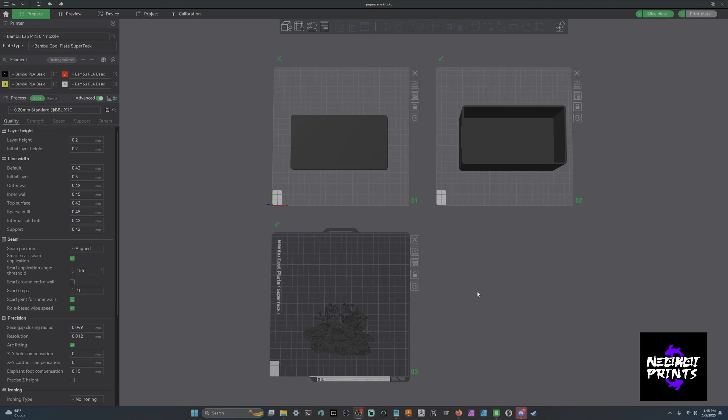Let's get into it. So we are going to start with putting a HueForge onto a functional design. This is a box that I found over on MakerWorld. I will put a link to it in the description.

So currently the lid for this box is face down so that if you have a fancy build plate or whatever, you'll get that design or that pattern onto the top of the box, so it might look a little bit better. But here we want to add our own designs to it.

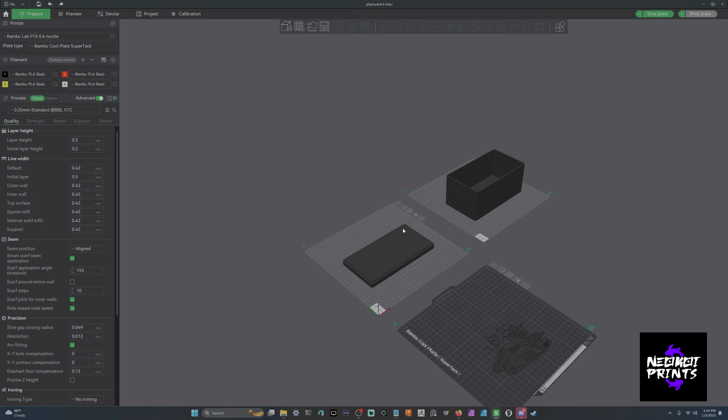So what we would need to do is come over to this plate. We need to flip it, so we'll lay it on its face, that way it's flipped over. Now when we do this, we are going to have to add support to this model, but that's okay, not a lot of support for this.

Now we will bring our HueForge over to the same plate, and we are going to hit Control on our keyboard, and we are going to select both items, and we are going to merge them. Now if we come over here to the objects, you will see that we have an assembly. We have the original lid, and we have my design.

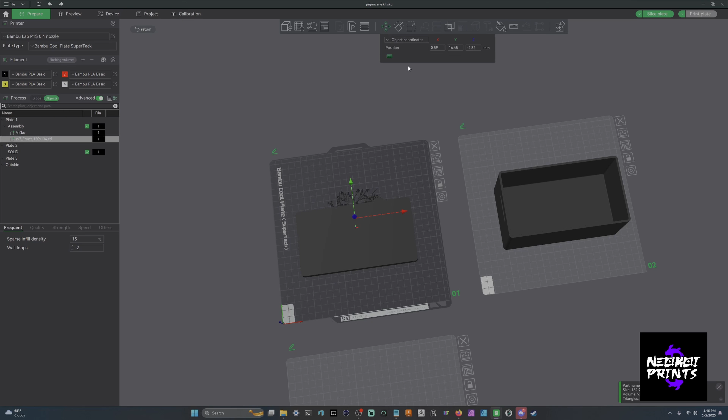Now what we need to do is, while they're assembled, we need to move the HueForge up so that it is on top of the design itself. I'm going to make this red just so that I can see it a little bit easier while I'm positioning my HueForge in place. So let's bring this down.

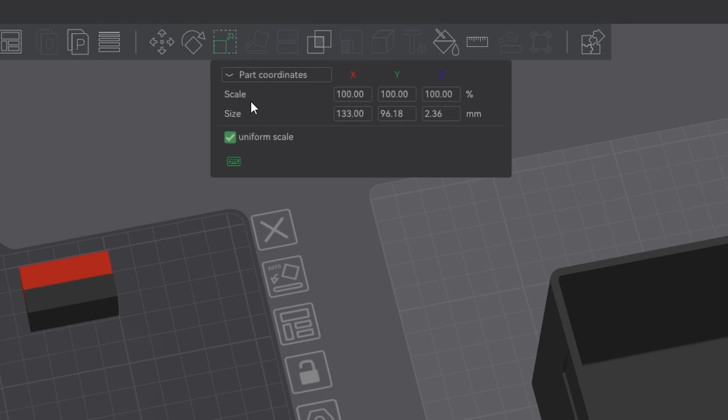Now, if you need to scale these HueForges, you're more than welcome to. For my design, I don't, but if you need to scale, all you have to do is turn off uniform scale, and then you can adjust your X and Y. You don't want to touch your Z, but X and Y will shrink it down the ways that you need to. If you adjust the Z, it's going to mess up your HueForge, it's going to mess up your swaps.

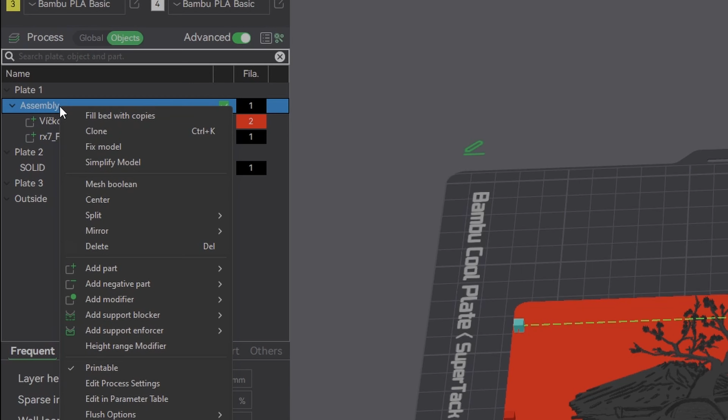Okay, so now that we have our design, the next step is going to be, we need to click on our assembly, right click, and then add a height range modifier. We are going to print the box lid at 0.2 layer heights, that way it doesn't take forever. And then once it gets to our HueForge on the top of the box, that's when we'll bring it down to that 0.08 layer height for this model, or 0.04 layer height, whatever the case may be for your HueForge. So that way we're not printing it forever at 0.08, and it's not taking us forever and a day to print this design out.

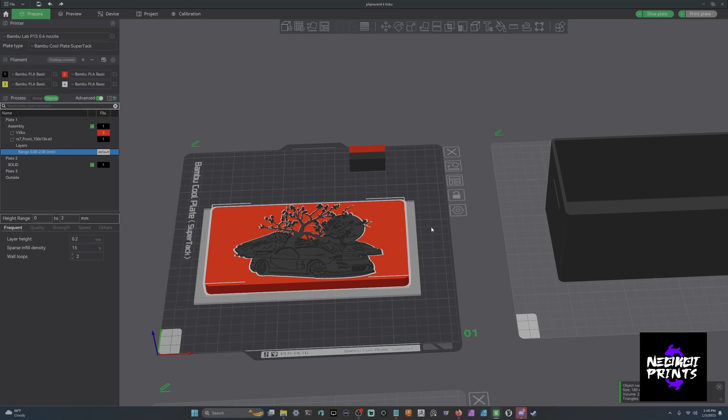So here we need to bring it up. I know that my HueForge starts at about 14 millimeters and it goes to about 16 millimeters, and you can see that there's a visualization to show you where it's going. Actually, it might be a little bit lower. Let's go to 13. That's a little bit better.

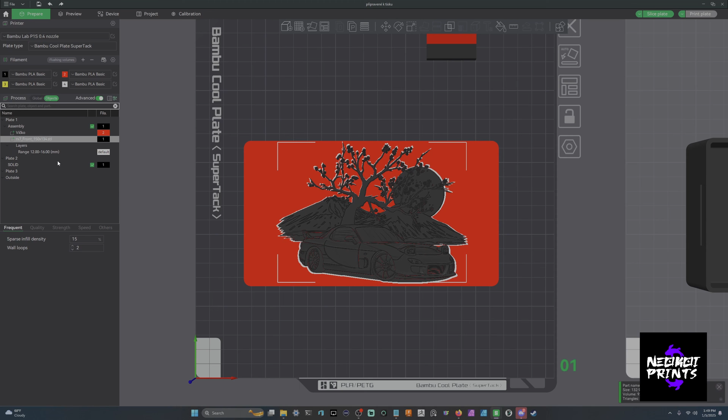So now everything in between these two ranges, the green box and this clear box, that's all going to be printed at 0.08 layer height. Now that we have the height range modifier set up so that everything in between is going to be printed at HueForge layer heights, we'll click on that modifier.

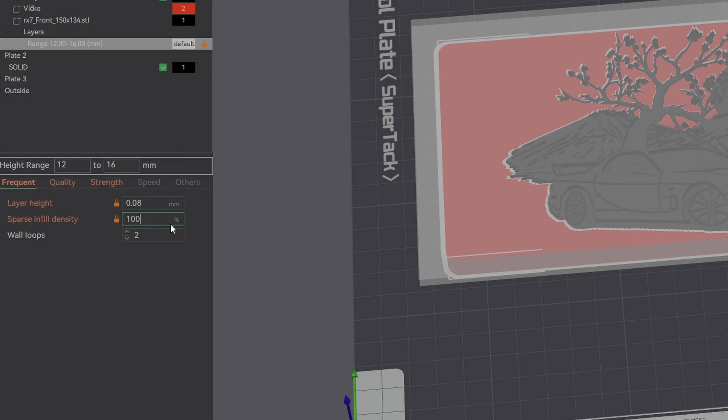You can see here you've got your layer heights, your infill density, and your wall loops. We're going to bring it down to 0.08 for this particular model, and then we'll ignore this, and then we will come here and we will bring it to 100% infill density, and then we will bring this down to 0. So now everything in between this range is going to print just like our Hue Forge, whereas everything below will print like standard settings that you want for your box.

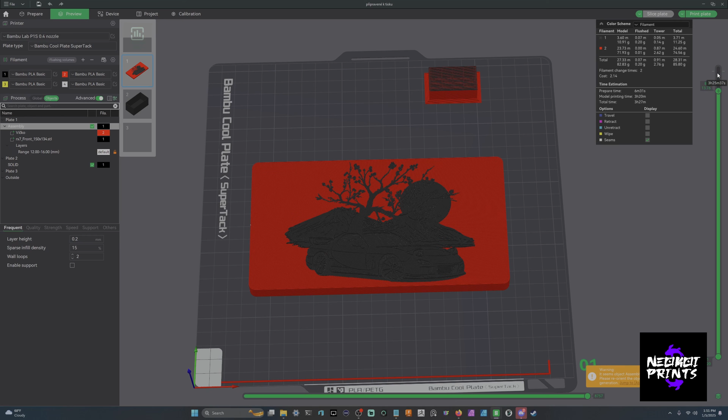So let's go ahead and we will slice it. Now we are going to take our swap file. You can see here that we start with black, and then at layer 10 or 0.88, that's when we'll swap to red. Here we're going to have to do a little bit of math. Not much, but if you come down, it should be around 12 that we start our Hue Forge. You can see here. Now if we come up to 12.88, that is where we will do our first color swap.

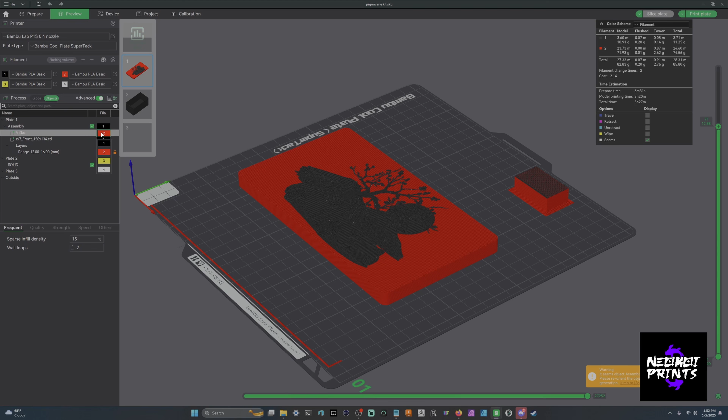Here's something that I forgot to mention. You can't do multicolor printing and Hue Forge printing. Because right now the Bambu Slicer thinks that we have two separate color models, thinks that we're going to do multicolor printing, you can see it by the prime tower, it won't let us do our change filament command. So what we need to do is make that box black again. And now we will slice it one more time. Now you can see that both the Hue Forge and the plate are the same color. At 12.88, we can change filament to red.

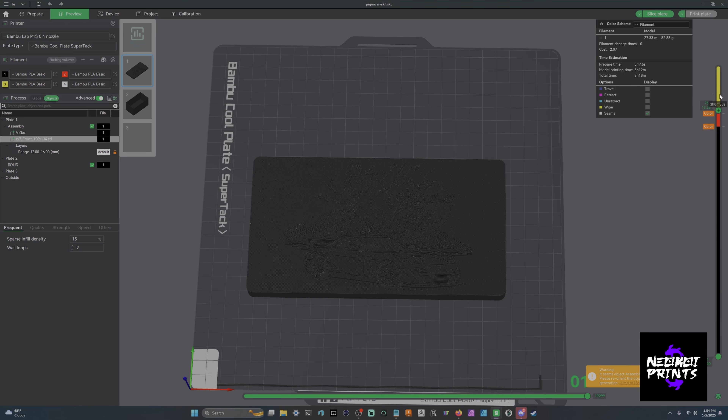So now let's go back to our document, and you can see at 1.2 we will swap to yellow. So that means at 13.2 we'll swap to yellow. Bring it up. Now we've got 1.28, we'll swap to white. So 13.28, we will swap to white. Now we have our Hue Forge stacked on top of a functional print.

It's saying that we have some floating areas. That's because we didn't add any supports yet, so I can go ahead and do that. Let's go over to global, add some supports. So now this thing is good to go to the printer just as is. I will print this out and show you what it looks like at the end, but this is how you can add a Hue Forge to a functional print. It's very simple, very easy to do. There just haven't been any real tutorials out there for it, so I figured I'd show you guys how to do it.

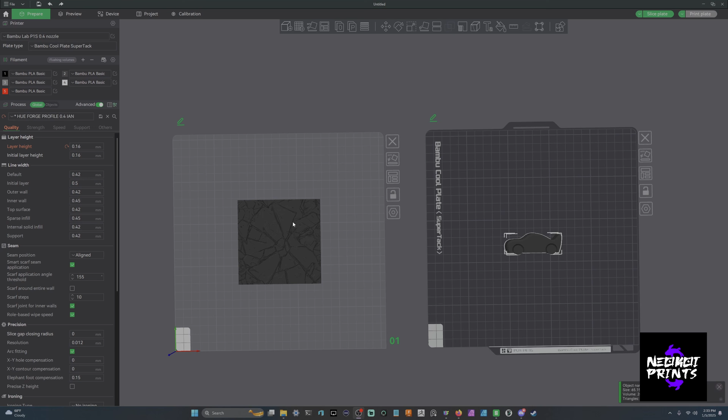Now let's do the reverse. We're gonna add a traditional 3D model to a Hue Forge. We've got this glass Hue Forge, which is the background, it's shattered glass. And then I've got this car model over here. This will also be linked in the description. What we need to do is cut this in half, and then combine it with this background to create that 3D look where it's coming out of the picture.

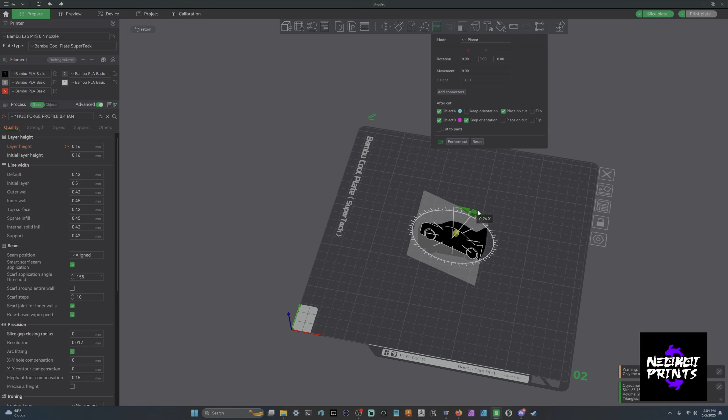So in Bambu Studio, all you have to do is come up to the cut function, and then you can rotate the cut, and you can see the plane rotating. That is where it's cutting. And let's give it a little bit of character. We can maybe make it look like it's coming out in a diagonal. We can use the green to move this around, and then we will perform the cut.

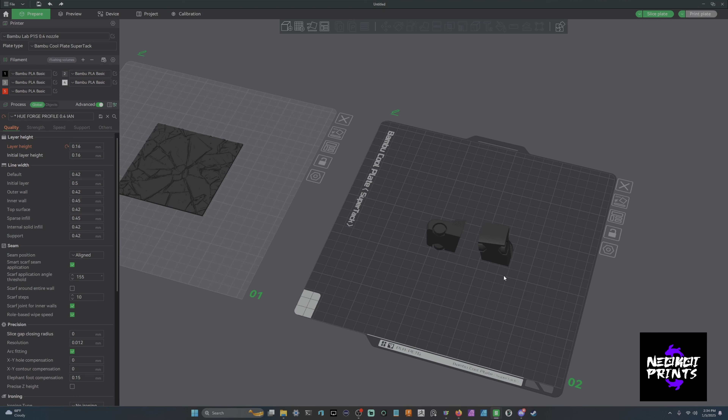Now the cut is going to cut it into two different pieces. We've got the rear of the car and we've got the front of the car. We're going to use the rear of the car so it looks like it's driving in. So we will delete the front of the car, and now we've got something like this. We want to make sure that it's lined up where we want it. You can also scale this if you want to, like so. Maybe we want it a little bit bigger so that it covers it a little bit more.

And then what we need to do is the same thing that we did in the last one, which is we need to hold Control on the keyboard. We have the car selected, and we will select the HueForge. Now we will merge those together. Now this is an assembly. So since it is an assembly, we need to take the car and lift it up just a hair.

And now something important to bring up: if you had a 3D model that you wanted multicolor and the HueForge, that's just impossible. You have to pick one or the other. You can only do swap by layer, or you can only do multicolor printing, like multiple swaps per layer. So just keep that in mind when you're doing this. If I wanted this car to be different colors, I would actually have to physically paint the wheels or something along those lines. So now we're going to have to do the height range modifier again.

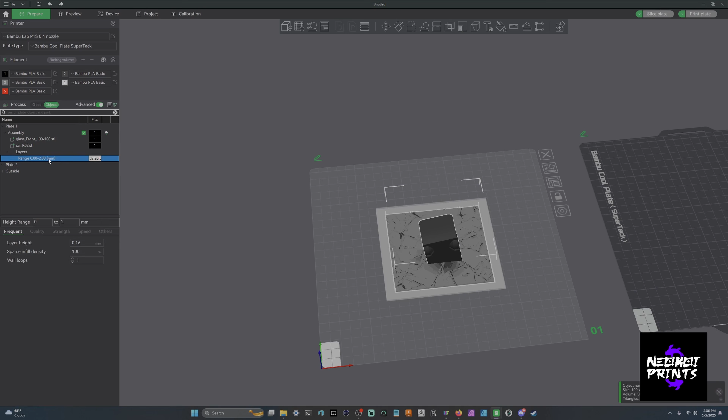We will do the height range modifier for the car this time. So let's go to our assembly. We will add the modifier. And now we can set up where we need that modifier. So the described text of this glass HueForge shows us that the max depth is 2.2 and actual depth is 2.4. So that means that we can set our height range modifier to 2.4 starting and then upwards for the rest of the car. So let's go ahead and do that.

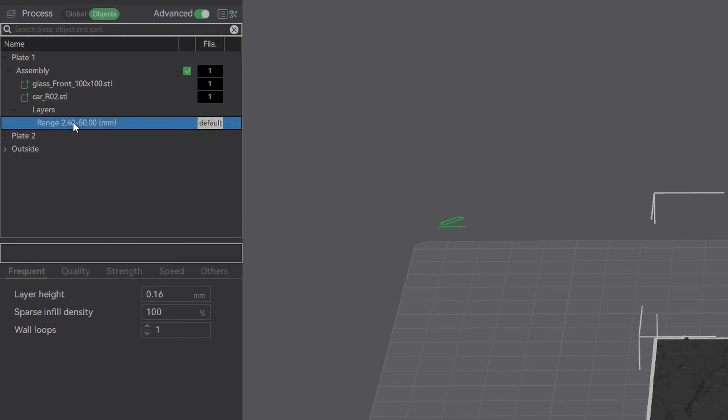We will set this to 2.4, top end to about 50 millimeters, and you can play around with this just to figure out what range you need. So now in our height range modifier, we will set it up the way that we want it. So we will do 0.2 layer heights. We're gonna do 10% infill, maybe 2 wall loops.

So now once we're done slicing the Hybrid HueForge, you can see if I drag this down, we have a normal amount of infill on the inside, and then it's 100% infill on the bottom. So now we need to do our color swaps. So let's grab this. It says at layer 6 or 0.96, we'll swap to blue gray. At layer 6, 0.96, I'm gonna just swap to this dark gray that I already have loaded so I don't have to reslice this whole thing.

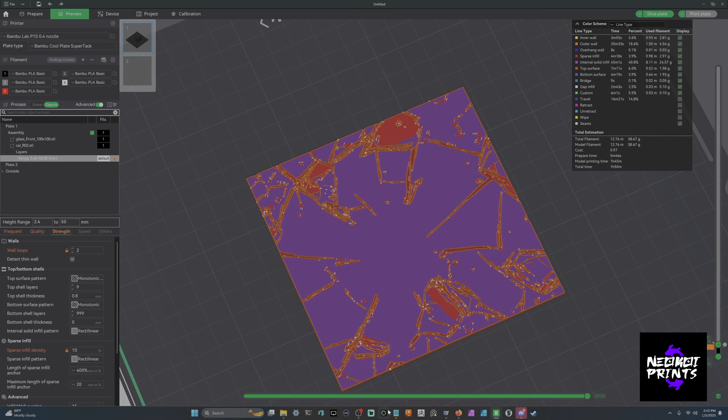And then at 1.28, we swap to gray. Swap to gray. And then 1.76, we'll swap to white. Now, if we slice it again, what's going to happen is the car itself is going to be white.

Now, like I said, if you wanted to do this hybrid HueForge with multiple colors, that's impossible. But you can still swap the color so that this is not the topmost color of your HueForge. So I have the red already loaded up. Let's go down to where the hybrid starts, about layer 14, and we will swap that to red. Now if we slice it, you can see that the car is now red. You can see that there's red on top of this.

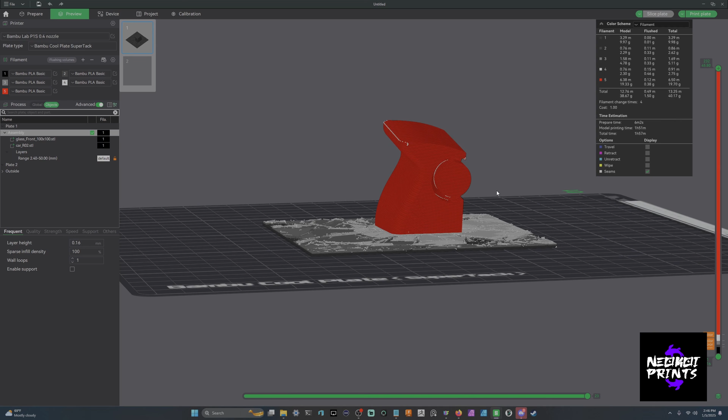We don't want that. So let's go here and we'll swap to red, 2.6. And that should take care of our issue there. There we go. So now we have a red car going into some glass. Like I said, you'll have to paint the wheels and the windows to make them a certain color. But still, that is functionally a hybrid HueForge. So let's go ahead and print them out, and then I will show you what they look like at the end.

So now we are done with printing, and this is the first design. This came out amazingly. This is the box with the lid that has my design on it. And then we also have the car, the little toy car driving through the glass. So this is a really cool way to add some flair to your 3D designs or your HueForges. Whatever the case may be, get creative with it.